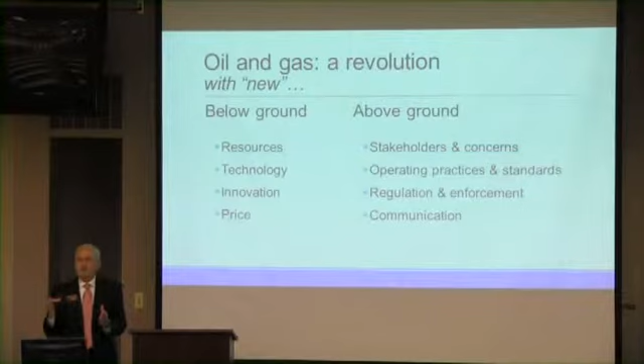And when you think about the fact that it's not all that long ago that we were thinking about importing natural gas, and we were talking about running out of oil and all of those kinds of things, that paradigm has shifted now. And in the public conscious, it started really in 2009, and I don't know that this commercial is going to play, but it was a Eureka advertising campaign that was done by the America's Natural Gas Alliance that played around the country and particularly focused in Washington, saying, wait a minute, we have a 100-year supply of natural gas.

Well, the Potential Gas Committee just announced a couple of weeks ago that we actually have 2,800 trillion cubic feet of natural gas resources that are available potentially down the road. That includes all different categories, but it's a lot of gas. Well, why is this revolution taking place? I'm going to just, at a very high level, give you a quick geology lesson for non-geologists.

If we think about the fact that throughout the history of oil and gas development, we've known that oil and gas is cooked in source rocks, shale, where critters and plants have cooked for 350 million years. This is a sample of the Barnett Shale. I'm going to pass it around. Feel it and see how dense it is.

The oil and gas is cooked in those rocks and seeps over a lot of time through more porous formations until it's trapped against a harder formation and causes a little pocket still within the pores of the rock. But that's how the oil and gas was trapped, and we would go explore and try to find these traps.

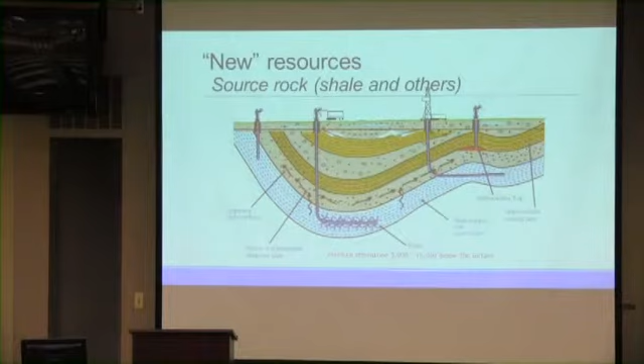The first horizontal well with hydraulic fracturing in the Bakken Shale was drilled in 2000. That was the first commercial horizontal hydraulically fractured well. And it was drilled into this rock. And I'll pass this around. This is a section of the Bakken Shale. It's actually a bit of dolomite, clay, and sandstone, and maybe some other things that Burt can tell us about.

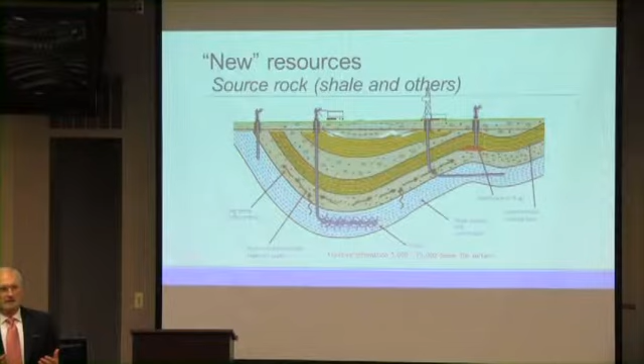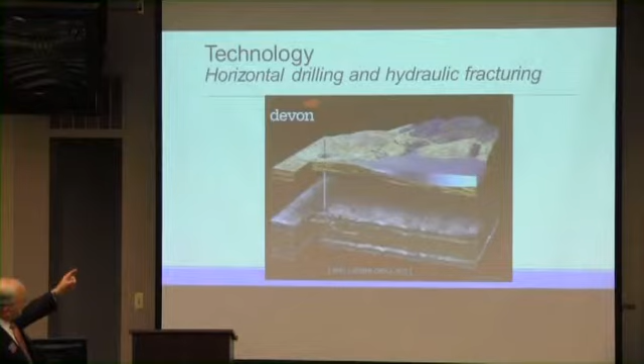But that well was in the year 2000. In the year 2002, the company I worked with did this on a large scale in the Barnett Shale of Texas and began proving that natural gas could be produced from those formations. So again, that's the fundamental. This is how it's done. The well is drilled vertically, it's turned horizontally.

The drill bit is replaced with a perforation gun that is put into the formation with a lot of different equipment at the surface. Little charges go through the pipe or the casing on the wellbore, and they open holes through which you'll see fluid and sand. The sand is in the fluid in order to prop the little cracks open when the fluid is withdrawn.

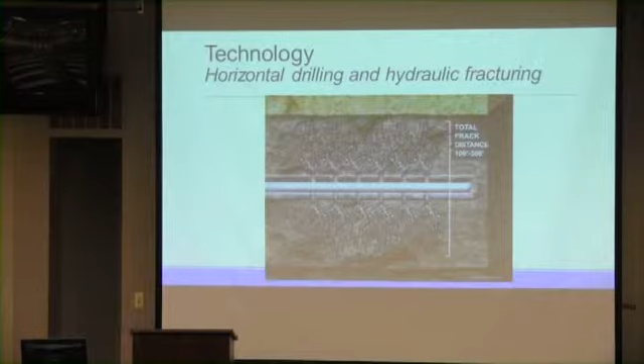And once that process is done, and Burt will have a lot more to say about this, and the fluids and the sand are withdrawn, then the oil or the gas flows through the fissures to the wellbore and goes to the surface. At that point, all of that completion equipment, as we call it, goes away.

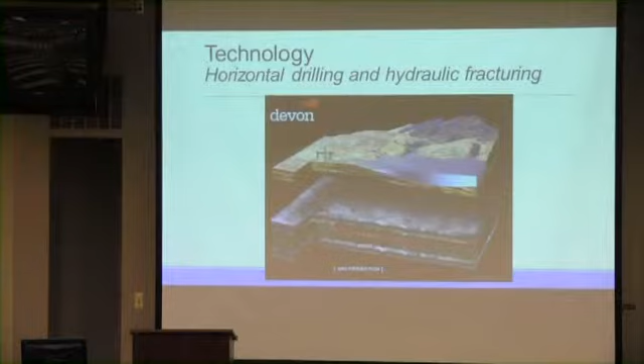The site is reclaimed back to a small wellhead, some valves, and maybe a couple of tanks, and that's the process of hydraulic fracturing. So again, it's at least conceptually not a complicated process, but it is very complicated, requiring geophysicists and reservoir engineers and lots of specialties.

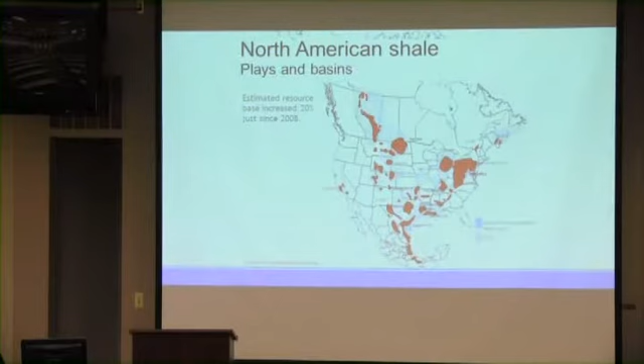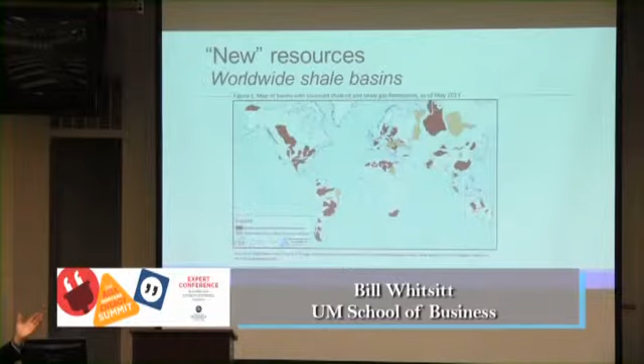There's lots of these tight deposits. There's a map of the U.S. that kind of gives you a flavor of where they are. Around the world, there are other deposits. We could talk about that if somebody wanted. We happen to be blessed in this country with some of the best in the world and the infrastructure to

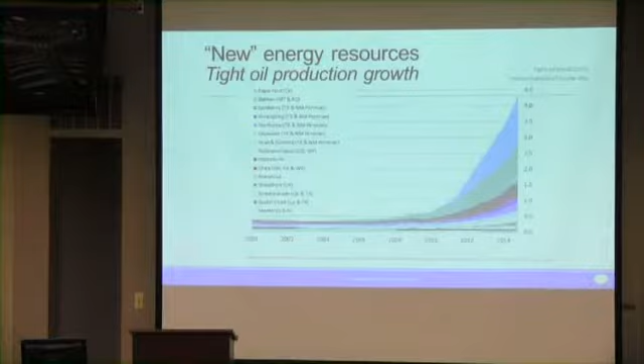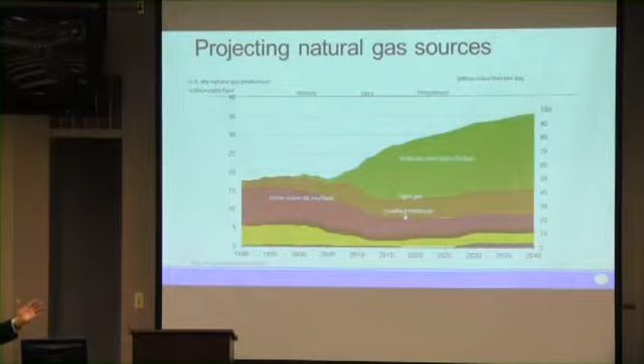support their development. You can see what's happened with tight oil production as a result of cracking the code, marrying these two technologies. It's been very dramatic. Pat alluded to it. The same is true for shale gas production. And if you look at just the recent Adam Sieminski energy outlook that he talked about this morning, there's the projection for tight oil plays and shale gas, tight gas, and other forms of gas out to the year 2040.

So with that, I'm going to turn this over to Burt, and he's going to talk about what this really is all about in deeper detail. Burt, in this.

So it's kind of tricky whether two engineers can figure out how to make the audio-visual equipment work. But thus far, I'm guardedly optimistic we'll be able to pull this off.

Greetings and good afternoon. I'd like to talk a little bit about hydraulic fracturing, but before I say anything about that, I recognize this is the Asia Montana Energy Summit. My talk here is very centered on issues that are relevant to Montana and the United States, but that should not bother anybody because the oil industry was born on this continent. The first oil well was drilled in 1859, and whatever happens here on this continent in energy eventually is exported to the rest of the world.

And so if it's not relevant in other parts of the globe now, it will be in some very near-term point in time. So I'd like to talk a little bit about hydraulic fracturing. Why is it controversial? What does it do? Why do we use this technology? I'd like to structure this. First, got to figure out how to make this go.

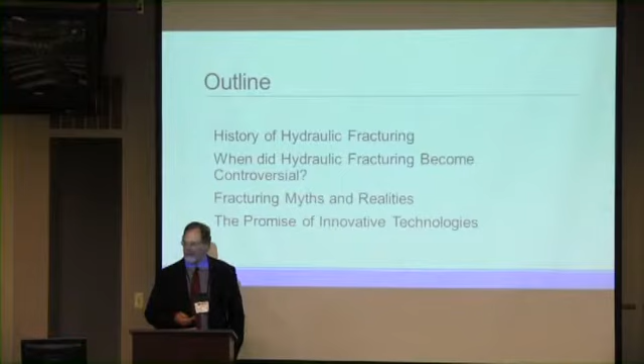Okay, why all the fuss? I'd like to structure this presentation around this outline, just give a brief history of hydraulic fracturing, talk about when it became controversial, deal with a few myths and realities relating to hydraulic fracturing, and then eventually get on to the promise of some of these innovative technologies. So what is hydraulic fracturing? Well, first of all, it's not fracking.

Now, my wife is an English teacher, and she's kind of sensitive to this sort of thing. There's no K in that word. The proper term is hydraulic fracturing, and if you want to go shorter, you can call it frac'ing, but just put an apostrophe in there, not a K. My wife, I mean, she corrects my language all the time, and I wouldn't want to get sideways over an issue like this.

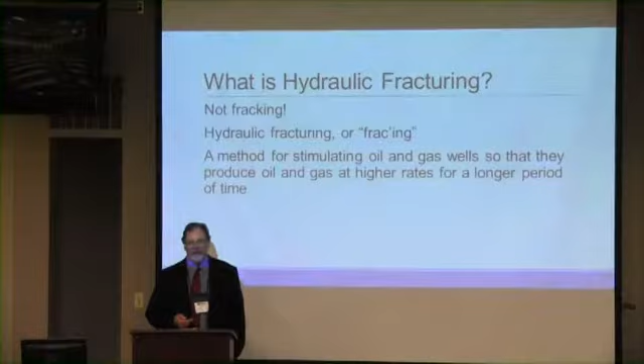What is it? Well, it is a method for stimulating oil and gas wells so that they produce more oil and gas at higher rates for a longer period of time. It is fundamentally helpful in the energy production world. Now, when did it start? Well, there's a lot of people who want to take credit for this. There's a group of people that think it had to happen in Duncan, Oklahoma in 1949. That's the corporate headquarters of Big Red, Halliburton. But there's an equally devoted group of people that think it started in 1946 in Hugoton, Kansas.

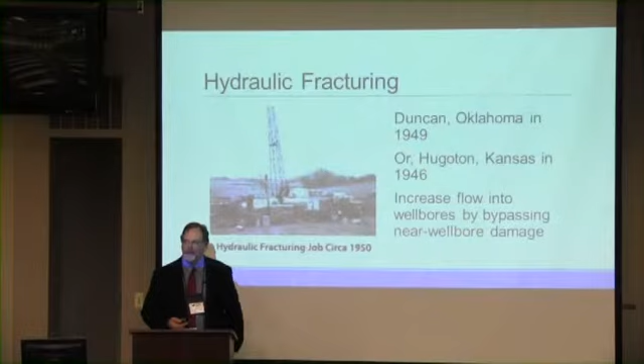Regardless, one thing we do know is that hydraulic fracturing is an effective technique for bypassing the damage that happens in wells during the process of drilling and completing an oil well. Quick note here, when you drill an oil well, you want to have a wellbore full of drilling mud. It controls the pressure, it keeps the well from blowing out, it removes the drill cuttings, it does a lot of things that you absolutely have to have. But the downside of that is that drilling mud seals the wellbore up. We don't want things flowing in before we're ready, but when it's time to produce the well, it is effectively sealed by the residue of that mud that's left behind.

Here's kind of a crude cartoon drawing. That's the kind of drawings I like best. Top view, here's the wellbore, and then here is a region of the reservoir surrounding the wellbore that is plugged with leak-off, with drilling mud, with cement residue, all of the things that just naturally happen in the process of making a wellbore.

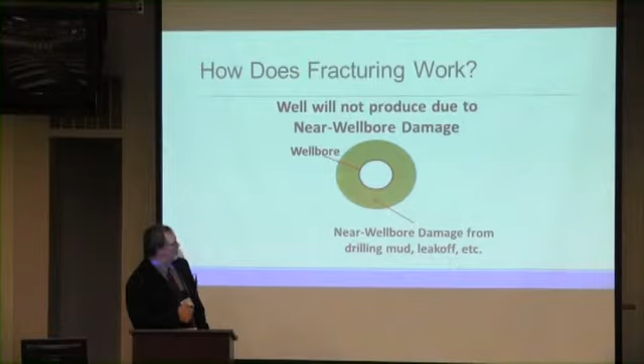And if you can't do something to get through that or get rid of it, your well never produces. So we introduce the hydraulic frac. We pressure up the wellbore, create a crack in the rock, and all of a sudden now there's a conduit into the wellbore. And we pack this crack with proppants, small grains of sand, and it creates a high conductivity channel, and all of a sudden we don't care about this damage anymore because we've got a path through here. Flow from the reservoir goes into the crack, down to the wellbore, and is produced.

I think you can well imagine what a valuable tool this is in oil and gas production, because it leaves the damage in place, bypasses it, and gets the well production up. It cures a host of problems. It gets your well producing to the maximum potential.

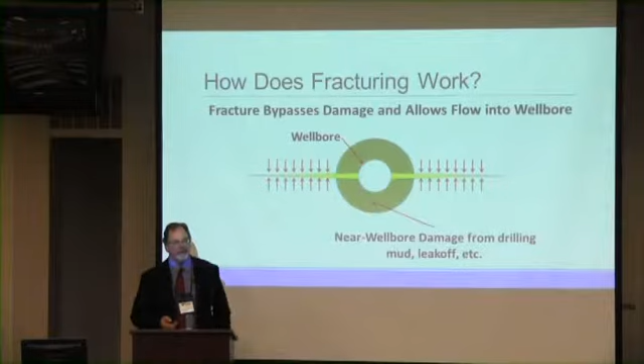Now, how big are these fracs? Fractures typically range between 100 feet and 600 feet in length, and somewhere between 100 and 300 feet in height. Now this depends a little bit on geology. It depends a lot on geology. What are your stresses in the region around the wellbore?

But it costs a lot to make a 600-foot frac. You certainly would never wastefully spend the money to create a frac capable of going from 10,000 feet to the surface. It's not cost effective, it doesn't help the well, and you never let a frac run away from you that way.

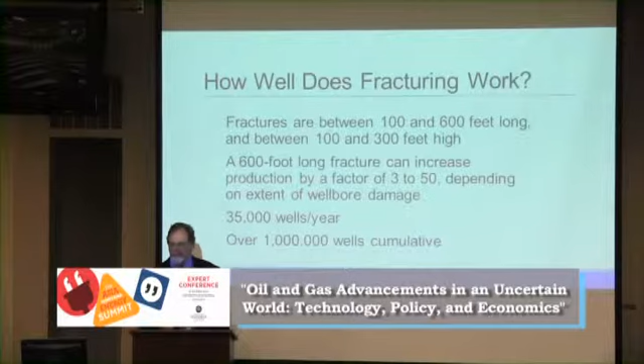What does it do for you? Well, a 600-foot frac will increase the production of a well by a factor of 3 if the well is undamaged, and by a factor of 50 or higher if the damage is severe. So it's a very effective tool for increasing oil and gas productivity. It's also a very common tool.

On the average, somewhere above 35,000 wells per year are stimulated with this technique. And since the inception of hydraulic fracturing, either 1946 or 1949, depending on which camp you come from, it's been used on well over 1 million wells. Some people estimate as high as 2.5 million wells. It's a proven technology, it works, and when it's done correctly, it's safe.

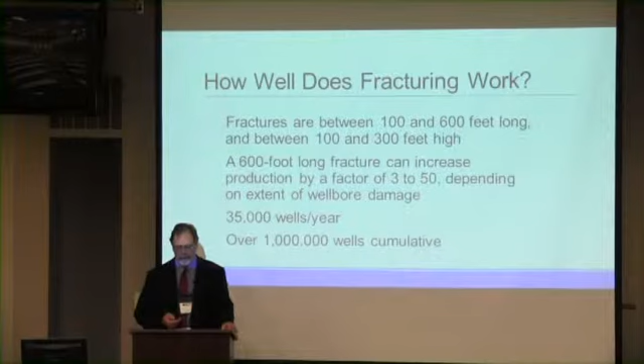So, when did hydraulic fracturing become controversial? Well, as Bill alluded to, it has a lot to do with unconventional reservoirs. In the 1980s, beginning slowly and then gradually picking up steam through the 90s and into the double naughts, the unconventional reservoir revolution began. And like Bill talked about, these are the low permeability source rocks that don't have enough natural flow potential to give you economic oil and gas rates.

So these formations, these source rocks are drilled with long horizontal wells. We used to think 1 mile horizontally was a long one, and then they went to 2 miles. Now there are some 4 and 5 mile horizontal length wellbores with hydraulic fracs spaced all along the wellbores. And this is what has sparked the unconventional reservoir revolution.

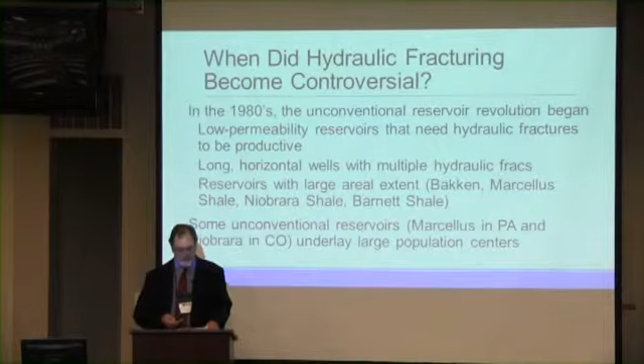These reservoirs are very large. The Bakken, we've all heard of this. It's several hundred miles across, several hundred miles north to south. Very large areas. And there's many others like this. There's the Bakken, there's the Marcellus Shale back in Pennsylvania, there's the Niobrara Shale, there's the Barnett Shale down in Texas. That's just a few. Some of these unconventional reservoirs, I'm thinking particularly the Marcellus in Pennsylvania and the Niobrara in Colorado, directly underlie large population centers. And that is the nub of the problem.

How did hydraulic fracturing become controversial? Well, Americans love to drive and we love living inside climate-controlled houses. I know this because those are two of my favorite activities. I'm American. Well, I've got white whiskers, I'm an old fella. I remember when hydraulic fracturing wasn't controversial. That is because the oil and gas were produced in rural areas of Texas, Oklahoma, and Wyoming. And back in those days, hydraulic fracturing was safe, effective, and nobody cared about it one way or the other.

However, when hydraulic fracturing and these unconventional reservoirs moved close to urban centers, suddenly fracturing is causing earthquakes, it contaminates groundwater, it contributes innumerable insidious evils. Everything up to and almost including the heartbreak of psoriasis is attributed to hydraulic fracturing.

Now, why is that? I believe the entire controversy about hydraulic fracturing is directly related to the not in my backyard principle. Everyone recognizes we need prisons, we need mental health centers, we need drug addiction counseling centers. Hardly anyone wants them in their neighborhoods. And it's the same with oil and gas. This is a major industrial operation.

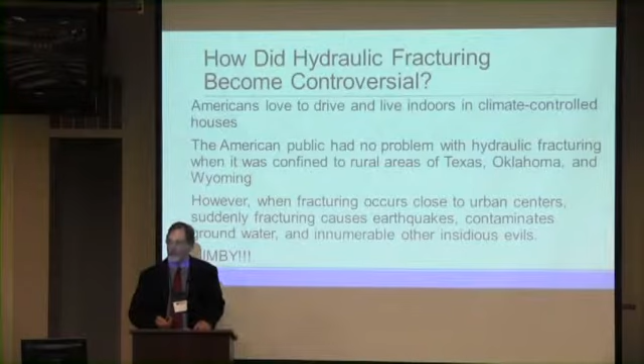It's loud, it's noisy, and right, nobody wants that in their backyard. And this has led to a lot of myths. There came a point where we stopped dealing with this on the basis of fact and science and started dealing with it on the basis of myth.

One of these myths is that hydraulic fracturing causes earthquakes. Well, fortunately, this is like Mythbusters. We can put the myth to the test. We have sensitive downhole measuring devices, geophones, that we can measure the intensity of hydraulic fracturing. And it's been done in a number of areas.

I know the print is really small, but there's the Barnett Shale, there's the Eagleford, there's the Haynesville, there's a number of these unconventional reservoirs where they've measured the intensity of these fracturing events, and it's small. Somewhere in the range of 10,000 to a million or 10 million times smaller than a 3.0 magnitude earthquake.

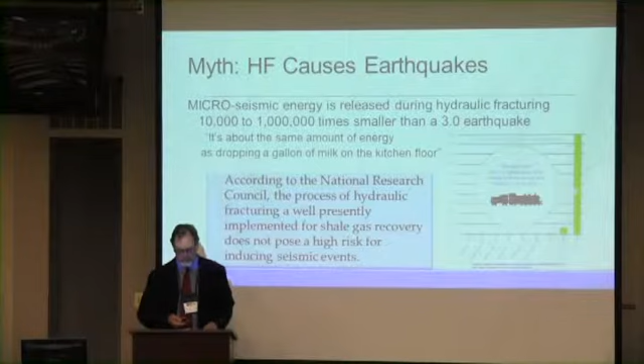According to the National Research Council, the process of hydraulic fracturing a well presently implemented for shale gas recovery does not pose a high risk for inducing seismic events. The actual energy is on the order of dropping a gallon of milk on your kitchen floor. It's just not that big of a seismic event.

Another myth that has come up is that hydraulic fracturing endangers groundwater. To that, I would say that hydraulic fracturing has been used more than 1 million times since the 1940s. There have been numerous investigations by the EPA and other agencies. And again, they find that proper well construction protects the groundwater.

And if you think about this in terms of something we all know, Bakken wells, they're 10,000 feet deep vertically. The top 3,000 feet are cased and cemented to protect the groundwater, and then the hydraulic fracturing happens 7,000 feet below that. That's almost 1.5 miles. There are layers and layers of Mother Nature separating these Bakken fracks from the groundwater.

In the words of Lisa Jackson, a former U.S. Environmental Protection Agency administrator, talking about all the investigations done by the EPA, in no case have we made a definitive determination that the fracking process has caused chemicals to enter the groundwater. Understand, this is the EPA. This is not some industry figurehead speaking here. These are the industry watchdogs.

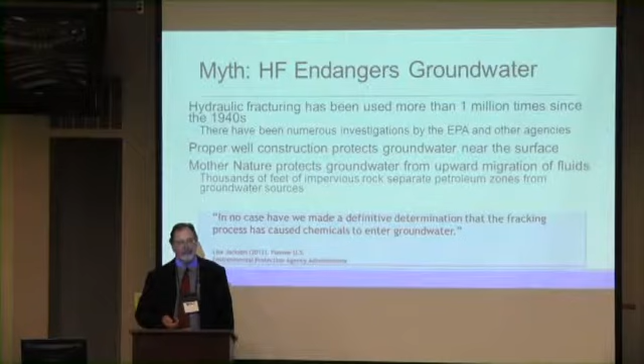And I've dealt with the EPA many times over the last 40 years. They're good at what they do. And if there were incidents of fracturing contaminating groundwater, they would have found it. Now, has there never been groundwater contaminated by oil and gas operations? Obviously that's happened. I've been involved in some of these cases. But it always is traceable to poor well construction, inadequately cementing the surface casing, inadequately dealing with some of the things that are regulations that are on the books now.

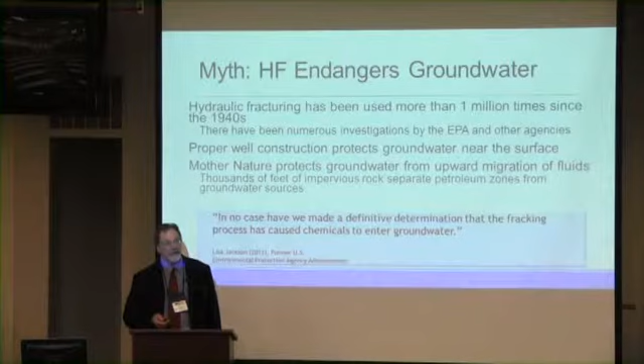Why is this important? We all care about groundwater. I come out of a farming and rancher background in the middle of central Montana. Nothing is more important than our water wells. We have to protect that. But we don't protect it by pointing the finger at something that is not the villain. When groundwater is contaminated, it's not fracking, it's poor well construction. That's what we have to focus on.

There's another myth that has got a lot of circulation, and this one really breaks my heart. This myth that natural gas production is holding back renewable energy. We're so in love with natural gas that we don't go after solar, we don't go after the wind. The reality is that the opposite is very true.

I grew up out on the prairies. There were days when the wind just about drove me mad. And every time I look up and see one of those windmills spinning and I see somebody plucking energy and money right out of the air, it makes me happy. I'm glad to see that. But even in central Montana, the wind doesn't blow every day. Even in the middle of the desert, the sun doesn't shine every day. And we like electricity every day.

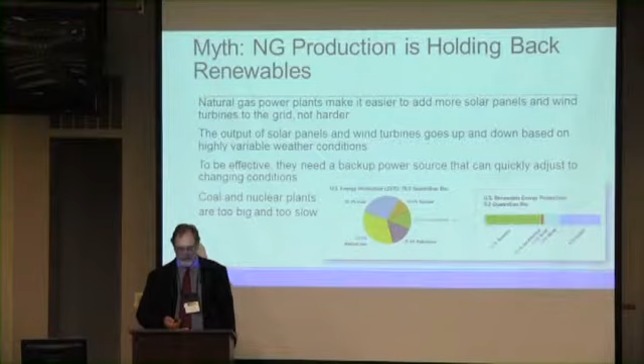That means we need another source of electricity. We have to power our electric plants with something else. You can't do it with nuclear. It takes too long to get the nuclear process up and running. You can't do it with coal. It takes too long to get those plants started. You need something agile. You need something that you can start and stop on a dime, and that's natural gas. The only source of energy that'll do this is natural gas. A natural gas plant can be stopped and started whenever you need it to accommodate the fluctuations of wind and solar.

In reality, natural gas, a hydrocarbon fossil fuel, is the key to making renewable energy happen in this economy because it plugs the gaps on all those days when the wind doesn't blow and the sun doesn't shine. Again and again, we hear statements that cast energy development and hydraulic fracturing in a bad light. But when we do the Mythbusters thing and put those myths to the test again and again, we find the science questionable and the facts very questionable.

Brothers and sisters, it's time to dispel these myths and deal with energy development on the basis of fact. We need energy. We like energy because we love the lifestyle it provides. So we have to put away the myths and the hysteria and deal with energy development on the basis of fact. What's at stake here? Reality is we are committed to petroleum as an energy source for the foreseeable future. Solar, wind, alternative energy sources, they have potential, but they're years away from being able to really carry the load. There's always going to be a mix, a portfolio of energy sources, and petroleum is king.

Ethanol made from corn requires more energy to produce than it creates. And something that's kind of hidden in all of this, solar panels. Silicon is a hot, dense material. You can't process silicon without large amounts of energy, which in this economy comes from natural gas and oil. We are married to petroleum, and we need to focus on doing petroleum very, very well.

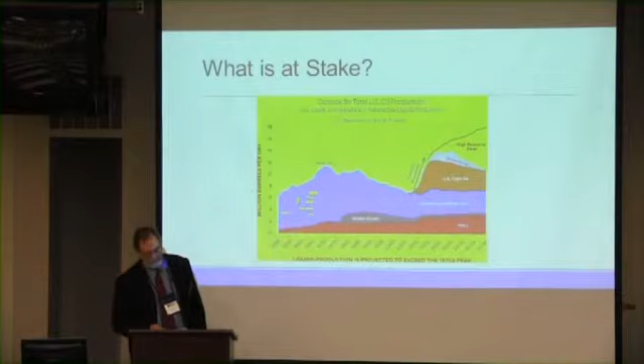Our balance of trade has been steadily declining because we have to import so much oil. This has created huge inflationary pressures. We've gotten into a healthcare crisis because the high cost of energy has crippled manufacturing on this continent. No blue-collar labor, no workers with health benefits. Sure, we have a health crisis. Our military has been involved in adventures in the Middle East, and despite what anybody says, that is to protect our sources of oil. But look what's happening.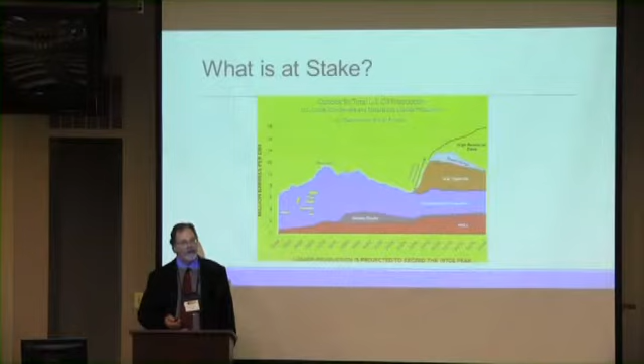The revolution. Beginning in 2008, we see this thing kick up hard. That's unconventional reservoirs. Once again, we are producing the energy we need to fuel the economic engine of this country. What's at stake here? For the first time in my life, the United States is within reach of being energy self-sufficient for the first time in decades. You saw the plot. This means an improved balance of trade. This means a reduction of inflationary pressures. It means stable blue-collar jobs with benefits. That's men and women working with health care benefits. It takes the stress off our health care system.

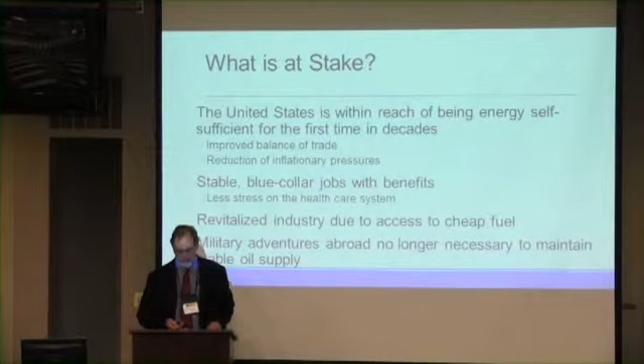It means revitalized industry. Nothing is more attractive to a manufacturing startup than a secure source of cheap energy. And for all of us with daughters and sons of a certain age, secure energy here in North America means we don't have to go on military adventures to maintain our oil supply. The stakes are high, but success is within our grasp. What's it going to take? The responsible use of new technology. I'm talking long horizontal wells, I'm talking multiple hydraulic fracks, I'm talking research on enhanced oil recovery. That's a big one, that's something I'm involved in personally. We'll talk more about that later.

But I think most importantly, it requires cooperation with an engaged and educated public. We don't want a rubber stamp. We don't want permission to do everything. An engaged public is necessary. We just want to debate the issues on the basis of fact, not myth. This requires that we recognize that we're all in the same boat, that we all need energy, and in our lifetimes that means petroleum. It requires that we deal with all this on the basis of fact and not myth. Who benefits? Well, it's not big oil. Big oil has kind of stood back from the unconventional reservoir revolution. They're not that excited about it. The costs are too high.

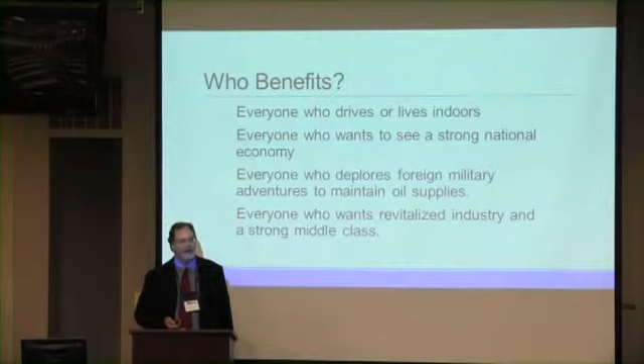They'd rather go drill something new and exciting in Russia or Indonesia or offshore Australia. The people that benefit are mom and pop operations here in the United States. The people that benefit are everyone who drives or lives indoors. The people who benefit is everyone who wants to see a strong national economy.

Everyone who deplores military adventures in foreign lands to secure an oil supply. Everyone who wants a revitalized industry and a strong middle class. I think that counts most of us.

At this point, Bill, I understand you have some comments on industry standards and practices. Let's see if the engineers could pull that off again.

All right. Well, Burt teed up the above ground part of what I want to talk about before we go back to the future of technology. Remember on that first slide I showed, we talked about some things happening in a revolutionary sense below ground, and he's explained the long laterals and the hydraulic fracturing and those kinds of things. But remember I said at the start that the oil and gas revolution is about more than that.

And now let's talk about some of the above ground things that are keeping pace with the oil and gas revolution below the ground. First of all, Burt left off with the engaged citizens and with what I call stakeholders of a broad range. And one of the things that we're seeing now that the oil and gas industry is paying a lot of attention to, more so than in the past, probably more so than they should have earlier in my career, for example, is stakeholders and concerns.

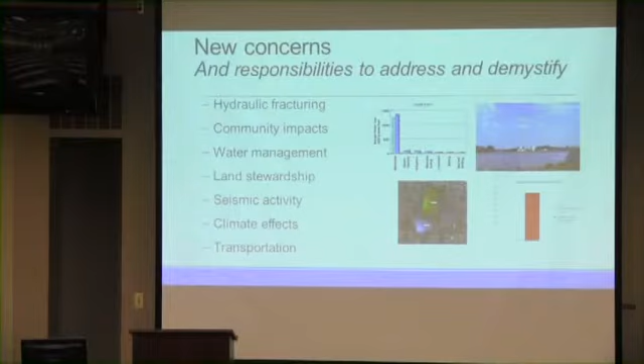But these new responsibilities that come with these concerns actually require a lot of different approaches. And Burt mentioned the operating practices and standards. I want to talk a little bit about that. Regulation and enforcement, make sure that there aren't bad apples and that people are doing what they're supposed to be doing. And then I'm going to have a couple of words to say about communication that is being stepped up across the oil and gas industry and with communities and that kind of thing.

Let's talk about these operating practices and standards. The worldwide standards for oil and gas operations really focus on the American Petroleum Institute. As Burt said, this is where the industry was born. It's where the standards really, in most cases, have emanated in history. And now, of course, there are European standard setting bodies and others, but API still is looked at as foremost in this field.

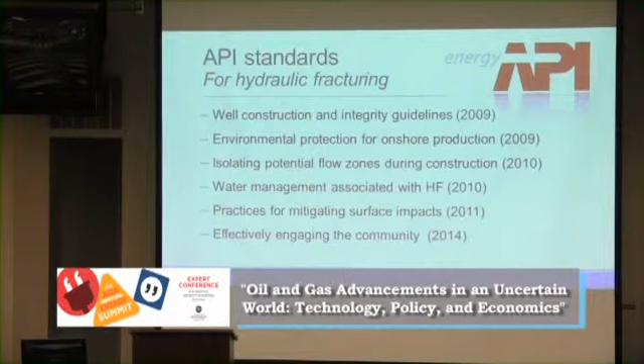These are just some of the standards that have been upgraded or put into effect since the shale energy revolution that address the very issues and concerns that you saw on the other list. Everything from well construction and integrity guidelines all the way down to managing engagement with the community. Again, this set of standards and guidelines and many more are marching in lockstep with the evolution of the technology and what we're seeing in the oil and gas revolution across the country and perhaps in the future around the world.

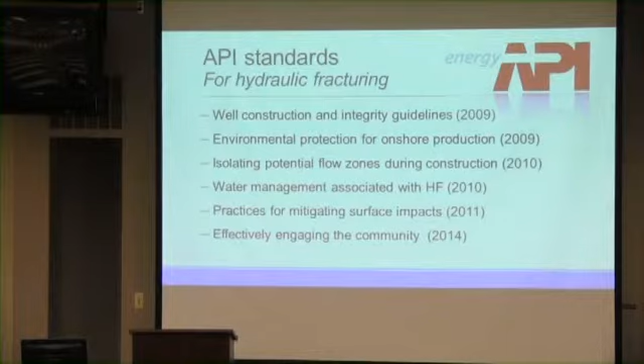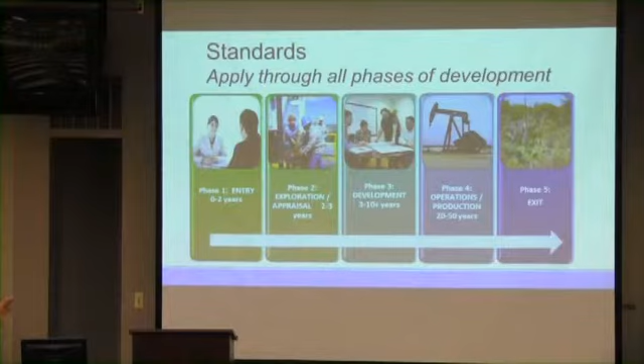These standards apply to all phases of operations, and industry abides by them. Everything from the earliest to the exit phase of an oil and gas project. And the standards process, not well understood, it's an ANSI process. It comes under the American National Standards Institute. It's a peer-reviewed and

periodically updated process that's open to stakeholders. Environmental groups, technology organizations, others participate in the API standards program, including Indian tribes, I might mention, because we know that there is a lot of increased interest in even more production from tribal lands in Indian country. Technical work is always ongoing, and then there is regular interaction and communication with state and federal government entities.

What about communication? Well, the industry, as you saw, has a standard that it abides by, or is supposed to abide by, in terms of engaging with communities. But what the industry found over the past decade or so of the shale revolution is that it was always on the defensive, and so it started more and more local, on-the-ground outreach, engaging local communities, and also doing some advertising. And let me just show you some of the types of ads that the industry has been doing in various parts of the country. You'll see when we see the ads that they're really designed to convey a sense that real people are engaged in this activity. It isn't a faceless company or corporation.

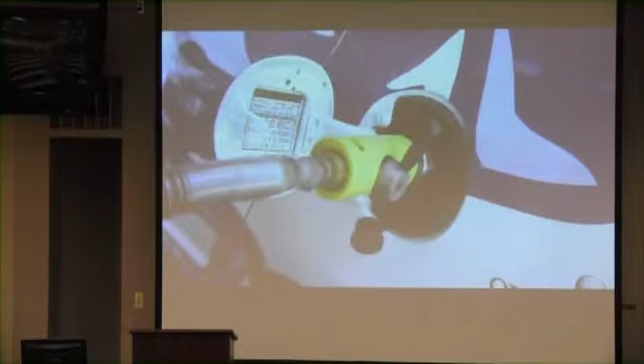Energy used to be from somewhere else. It's not anymore. Energy is from here. North Texas is on the cusp of a transformation, and we see it in education. Students now see that the energy business has enough resources to drive it. When we take a look at natural gas production here, we are talking about environmental stewardship. What really gets the kids excited now is a future and opportunities in it.

Well, the standards are great. The communication like this, I guess, is great. But what about who's minding the store? Let's talk a little bit about that. Let's talk about regulation and enforcement. One of the other things that I mentioned in the above ground area or arena is part of the oil and gas revolution that we're seeing today.

In the regulation of oil and gas, the states lead. In our system, as you know, we have different levels that have different responsibilities constitutionally, and in this area, the states not only enforce state law and regulation, but they also have primacy for enforcement of federal law, Clean Air Act, Clean Water Act, those kinds of things in almost every case, not every case, but almost. And they've migrated to that view because of the local conditions and the expertise that the states have to deal with their own issues.

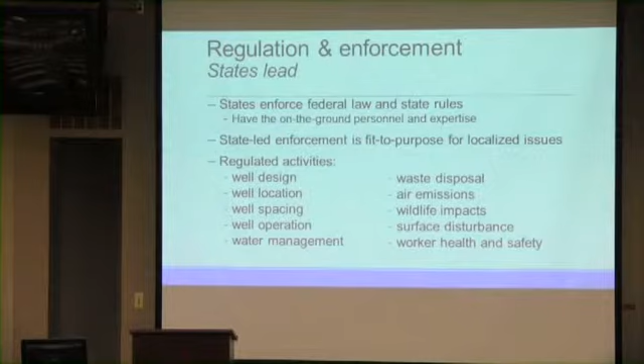And what we see is the state-led enforcement for those reasons has led to a whole list of the regulated activities that you see there. Every one of the things that we've talked about as a concern area has a state lead component to it. And the states are in charge, basically, of making sure that the operators and others do what they're supposed to be doing.

If Tom Richmond were here, Tom was, until he was appointed to be a state representative, actually head of the oil and gas division of the Montana Department of Natural Resources, and that's why Tom was going to be doing this part of the presentation. But Tom would tell you that the states are really moving toward continuous improvement in all of these regulatory areas, and they're doing it now under what's called the States First Initiative.

It's a program that's a joint venture of the Interstate Oil and Gas Compact Commission, which is made up of the 30-some states that have oil and gas production and their governors, and the Groundwater Protection Council, which is an organization that represents the state environmental directors and the state oil and gas directors in oil and gas producing states and well beyond. So it's made up of environmental regulators.

These two organizations have put together this initiative, and by the way, it was driven by the oil and gas revolution that we've been talking about, to make sure that there's a robust regulator exchange that allows regulators to share best practices, to bootstrap one another, to make sure that they're doing the right thing and meeting the right standards, and then doing peer reviews to make sure that they are doing as well as they can to protect their environments and communities.

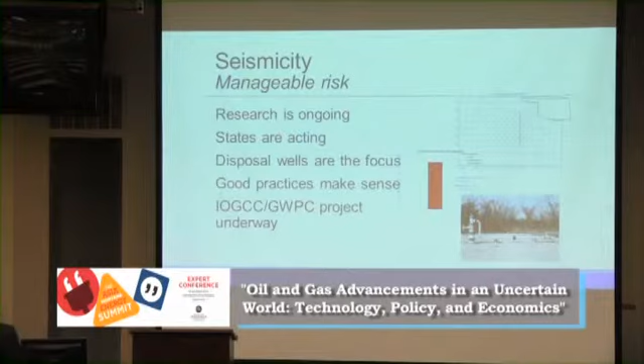It's what happens when you dispose large quantities of water into deep formations under high pressure. Now, disposal wells throughout the United States have existed for decades and decades. They are regulated by the state. There are different classes of disposal wells. There are hazardous disposal wells for hospital waste and all that kind of stuff. And then there are these saltwater wells.

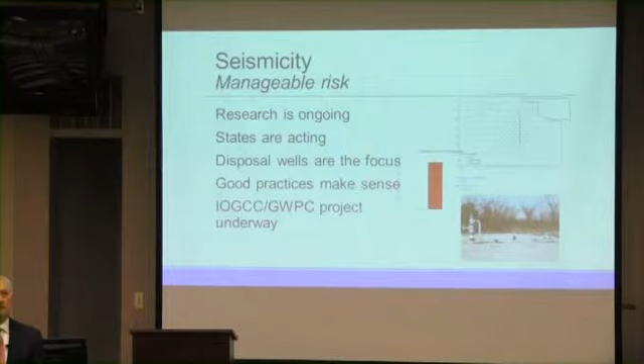So there are now studies that are being undertaken by GWPC and IOGCC, U.S. Geological Survey, to find out what the best practices ought to be if people are going to try to put a disposal well in a particular location. Already, my company, when I was there several years ago, already had best practices where we would use our seismic imaging to make sure that if we were going to drill or propose or even contract with somebody for a disposal well to put salt water into the ground, that we weren't going to do it into a fault and lubricate that fault.

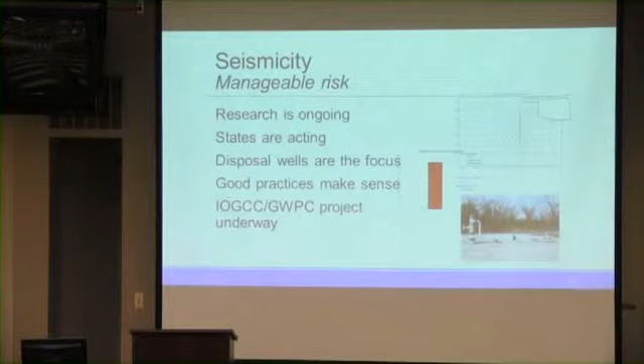So again, the industry, government, the states are moving pretty aggressively to make sure that to the extent good practices can resolve these issues, that people are paying attention and that they do it. But it's another example of how these aren't issues that are just being left alone. They're being addressed, and we can debate whether or not they've been addressed fast enough or they'll be addressed aggressively enough. But in terms of the revolution, it's a sign of the times that all of these things now are being paid attention to.

And now I'm going to let Burt take it over and talk about what's ahead in terms of technology. Haven't dropped it yet.

Bill touched on a couple of things that I'd like to follow up on just briefly. He showed you that one picture of a well location with well bores going in all directions. This is a direct outgrowth of a concerned public getting involved, making their voices heard, and leading to improvements in best practices.

I was flying into West Texas one time, and I took off out of Midland, Odessa, which is just out in the middle of Texas, it's just nowhere. I mean, it's a long ways. It's 6 hours to any place on Texas roads in a very large car. I don't know what that is in miles. But I flew all the way to Houston, and virtually the whole distance, it was lights on a grid pattern everywhere. And those were all well locations.

And Texas has been the center of the oil industry for close to a century. And the way it used to be done had these well locations everywhere. But because of a concerned public making their voices heard, and because of an industry that recognizes that in this day and age we operate at the public's permission, we're doing a lot of things different and we're doing them better. And these well pads with 32 and 64 wells coming out of an area that we used to just have one well on is a great example of better environmental practices, better industry practices.

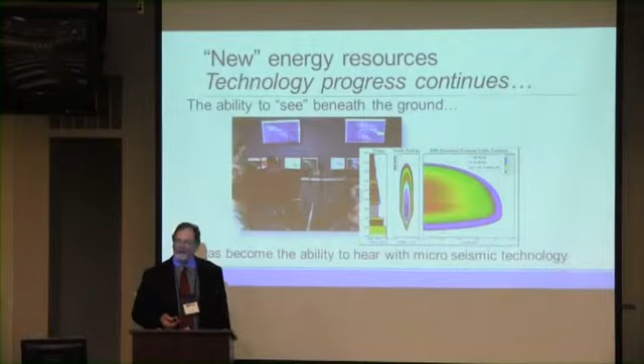But now for the first time, with different types of instrumentation, we can actually hear what goes on underground. And the implications of this are astounding. If you hear where the fractures are happening, where they're being initiated, it gives us a lot better understanding of where we're fracking. It gives us a lot better understanding of how far they go. It gives us much better understanding of how big the fracks ought to be to minimize cost, maximize recovery. I want to take a look here at what I'm talking about.

Is there a go button on that? Should be running. There. Yeah, you might have to do it on a static display.

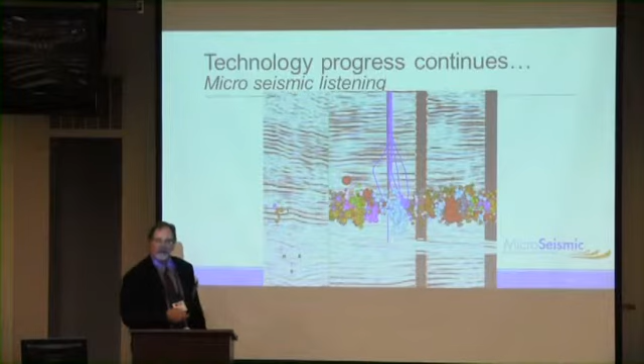And this height growth, we're having maybe 300 feet of height growth show up here, but there's nothing going to surface. You can't hear any sound showing that these fractures are running away and breaking out at the surface. It's really an interesting technology, and it gives us a lot of tools for understanding better what goes on under the ground. It is this kind of innovation that will allow us to continue to drive the oil and gas revolution, and it'll take it beyond what we can even imagine today.

Now, the other thing that I'd like to talk a little bit about is this enhanced oil recovery. I've been doing a modeling study. It was funded by a grant from the Montana Board of Oil and Gas. Basically, I went to Elm Coulee. It's that big field over there by Sidney. Found an area, 6 sections, 3 wide, 2 tall, has 9 wells in it. I got all the geologic data I could, and I went and built a simulation model.

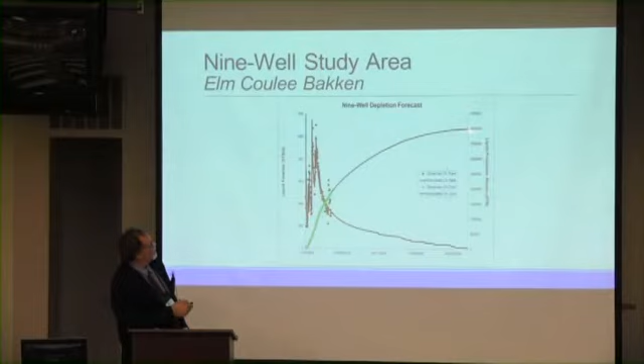Now, you can see here that it's recovering about 4 million barrels of oil out of that 6-section area. It sounds like a lot, but that's really only about 15% of the oil that's in the reservoir there. Okay, that's the case if we do nothing.

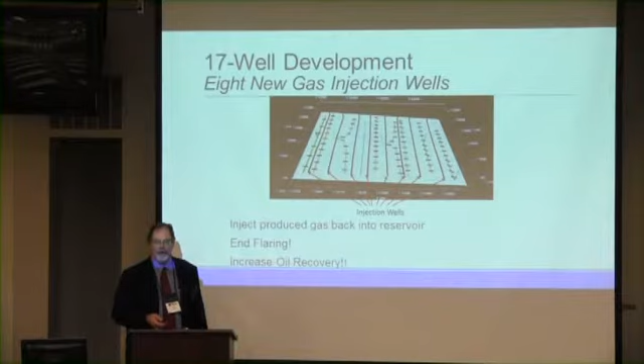Now the big news there is we'll be catching the gas, re-injecting it, and flaring natural gas will be over with. Gas is a precious natural resource. It's an excellent EOR fluid. And we're looking at schemes to re-inject that gas, stop flaring, and increase oil recovery.

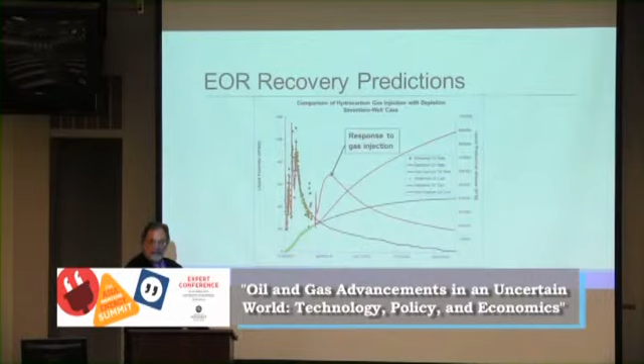If we do nothing, we get this huge spike, it falls, dies. If we start this enhanced oil recovery process, we get this delta, and it just goes and goes and goes. There's this sense that these reservoirs, if managed properly, will be a gift to our children and our children's children, and very likely our children's children's children.

This is part of this unconventional reservoir revolution. No longer is oil a flash in the pan, produce it like crazy, and then go out and find more because those old wells are used up. These unconventional reservoirs have the potential to produce and produce over years. Now, what do the numbers look like?

The economics are challenging because to do this enhanced oil recovery, there's a huge upfront expense. Had to drill 8 new wells, had to make a gas injection plant, had to make gas collection facilities. There's a lot of upfront investment. The economics are kind of marginal. 10 to 15% rate of return, long project life.

But here's the key. These economics are very similar to manufacturing economics and agricultural economics. I told you I grew up on a farm. The hardest thing a farmer ever does is buy land. Huge investment. And you have to do it early in your career. You don't have anything to farm.

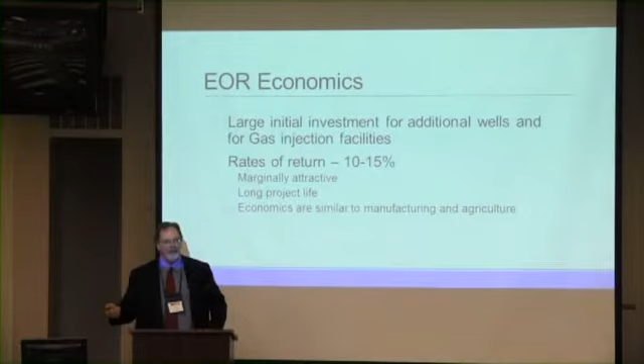But if you could somehow lay your hands on land, you farm that and it produces and it produces, and one day you hand it off to your children and they make a living on it too. These economics are very much like farming and agricultural economics in that the project lives are generations long.

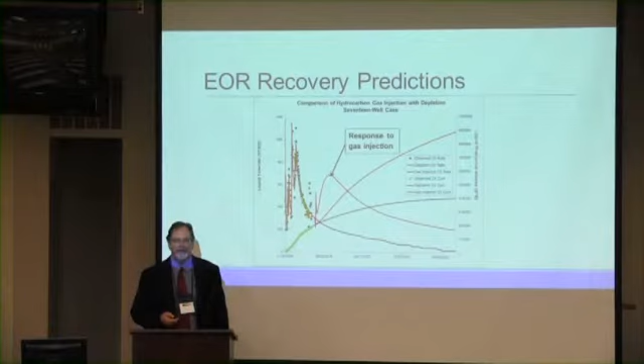More of this oil, this unconventional oil revolution. And the thing that happens here is pretty crazy over the Williston Basin. It's a gold rush, oil boom economy.

There's man camps, there's trucks on every road, it's chaos. As we transition out of the drilling period and into this enhanced oil recovery period, it's a much different economy. There's an increased tax base, there's a lot of jobs for skilled blue-collar labor, there's people buying houses and putting their children in the school system. That is part of the benefit of a stable, homegrown energy supply.

I believe that as we continue to develop this technology, you'll be hearing more about this. I believe that at some point this will merit some special tax incentives to help get these projects off the ground. And I'm confident that the economic future of Montana, North Dakota, Saskatchewan, part of Manitoba, is intimately tied with this enhanced oil recovery technology applied to these unconventional shale reservoirs.

Having said all that, I want to say thank you, and we'd be glad to entertain any questions you might have. Wonderful. Well, if I could ask you, maybe you could have a seat next to Bill. I think this has been a wonderful opportunity to learn from experts. And so now it's time to customize their remarks by responding to what your concerns are. I think we're a fairly small group, and I think we can just deal with individually. I've got some questions here, but I always hate it when the moderator asks the first question. So let's hear from the audience. Who has the first question?